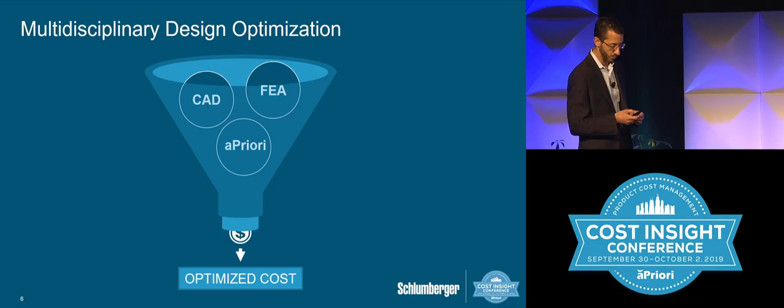So, executive summary. We have two ways of looking at design trade-off. First is one we're going to call static post-design trade-off. What it means is we've done a lot of work, and then we combine it and show it to our stakeholder, or client, or suppliers. Here, I'm going to show you an example of what we've done in the past with that product.

So if you look at this picture, you can see a subsea landing string. It's a safety mechanism used below a platform in the ocean. It's a very big piece of equipment - if you look, there are two technicians there, showing you the scale of the tool. It's about 4 to 5 stories tall. So as a team, we had to develop the next generation of this product.

And as we've seen earlier with a previous presentation, it's good to get as many concepts as possible very early on. So here we developed 7 different concepts, and we did a lot of FEA work, a lot of testing, a lot of hardware testing. But in addition to all that work, we ran about 7,000 quotations with aPriori to get the price point.

So when you do a trade-off, when you share trade-off information with your stakeholder or management team, you look at different charts. A classical one is a spider web chart. Here I put the best price as the top one at 12 o'clock. Then as you go around those 8 axes, you have the tool internal diameter, the tool external diameter, and so on across. What's interesting to do for the design trade-off is to map each of these concepts with their respective criteria.

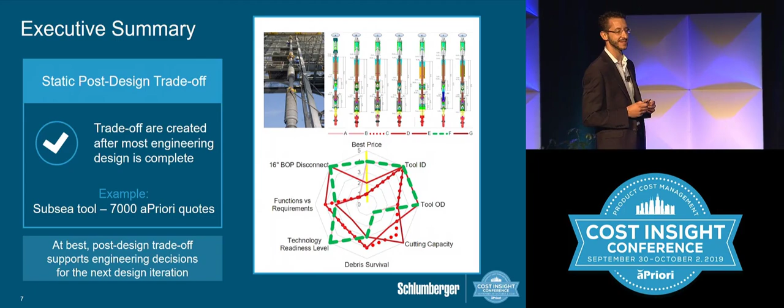Then we go on, D, E - F actually had a better price, but for us it was not the Ferrari. It was maybe another brand, I won't say any. But it had all the functionality we needed, it just wasn't our strong interest. And then we had G. So what was interesting here, from an aPriori point of view, is that very early on we were able to have price points and be able to select which design we went with. And we decided to take F and improve it, of course.

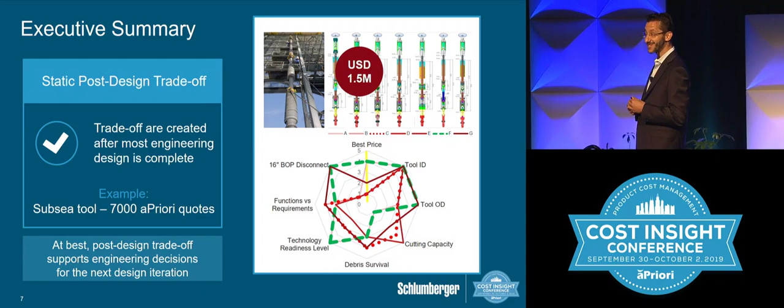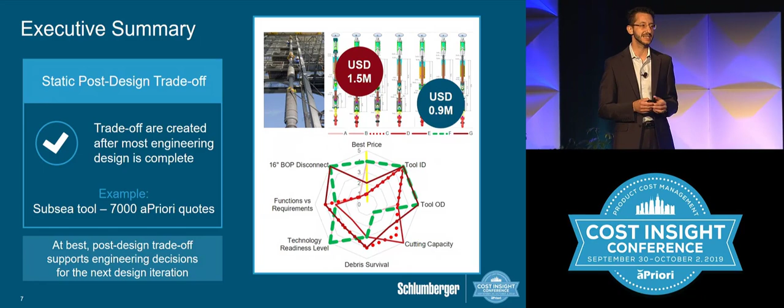The one we really liked as technical people was the Ferrari in red at $1.5 million. And the one that was more aligned with what the market is able to buy was the F1, the sixth one. But that's a static post-design trade-off.

Now let's look at what we're going to present today, and we'll go into more detail. It's really an interactive upfront design trade-off. It's a bit of a complex graph, and we'll see more detail in dynamic fashion after. What you have is parallel information on this graph. On the left-hand side are the inputs, so the first 3 lines are input, and on the right-hand side you have design output. You can change the variability of each of those parameters to get your output.

To put it short, we had a cylinder that was a piston, loaded with a complex load pattern in buckling mode, as well as collapse pressure. The story is we had a 10,000 PSI piston, and one of our clients said, hey, I have an application where it's 12,000 PSI, the envelope that I need. So we went to check if it works. It didn't work. It was too marginal as a design.

So if you have engineers in sustaining, we know the trick. We say, let's take a higher grade material, Inconel 718. And what we see is that our baseline price of 126 with the original design, when we take Inconel 718, turns into a $345 solution. Fantastic, we have a solution.

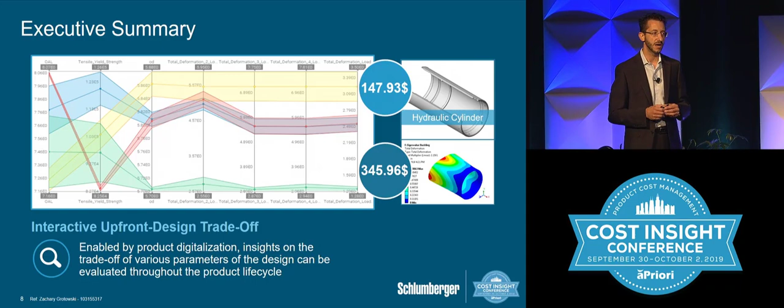But thanks to this interactive upfront design, we were able to find alternate designs with different materials, different geometry, different size, in which we found a price point at $147. So for $20 more, we had a solution instead of 3 times the price.

So why do we need design trade-off? It's very important—we talked a lot about collaboration today. Design trade-offs are used to communicate. It's a communication tool between the different stakeholders in the value chain: your team, your supplier, your management, your technical team, your risk assessment team, your financial team.

It's a visualization tool in order to simplify what's typically complex. Typically you have aggregated data. They're often technical, but you can have financial data as well, other types of data. It's always good, if you can, to have the previous generation of a tool or a point of reference that people can relate to. Here, as an example, it's from an architectural example—I purposely took it far away from our domain.

We see a team of architects that looked at 12 alternate designs, then looked at 4 different criteria. When you have that information, you can do a performance analysis—you combine those criteria together, and then you have a ranking from, let's say, 0% to 100%, and you're able to rank that. So in this example, we see that alternatives 6, 10, and 12 were the best designs that team was supposed to work on.

In order to expedite generation of trade-off, we get some benefits when we're able to do that. When we can expedite trade-off, we can have more innovative ideas because we can do sensitivity analysis around some of the points we look at. We can also accelerate the project because as a team we take the decision a bit earlier to go in that route or that route as early as possible. Then we can select the cost of the tool or the building that's the cheapest, so overall you save in labor and spend on your project. All that maximizes return.

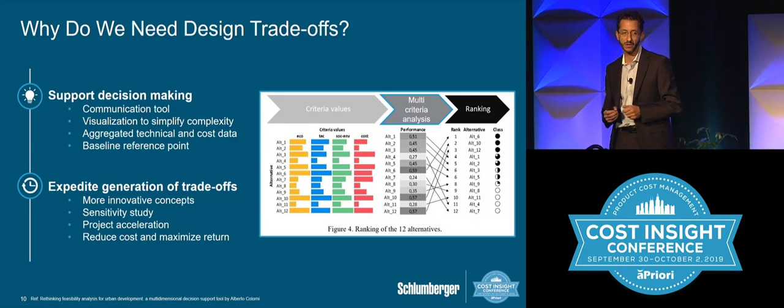So what's the limitation of trade-off curves? Here, for example, we see a very good example of great trade-off curve work, but it has limitations. A team of engineers looked at 6 different concepts of airplanes, and I'm sure each engineer behind each concept loved their airplane and fought for it.

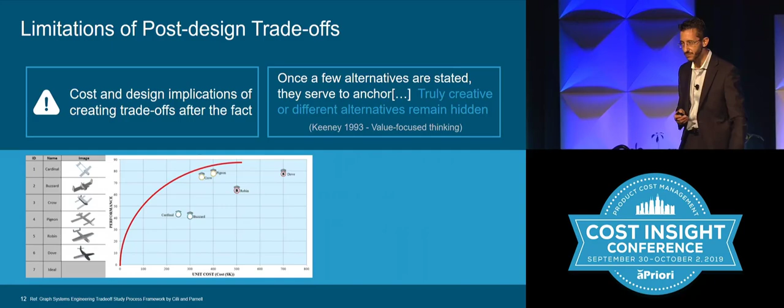So the name of the game and what we're going to show you is to look for this optimum. If we look at literature, you can go to Wikipedia, the source of literature. This is called the Pareto front.

So all the game here is to try to optimize different objectives. Objective 1 on the x-axis, let's say it's the weight of an airplane. We're going to try to minimize the weight. And then objective 2, it's the cost of this airplane. So we're going to try to minimize that.

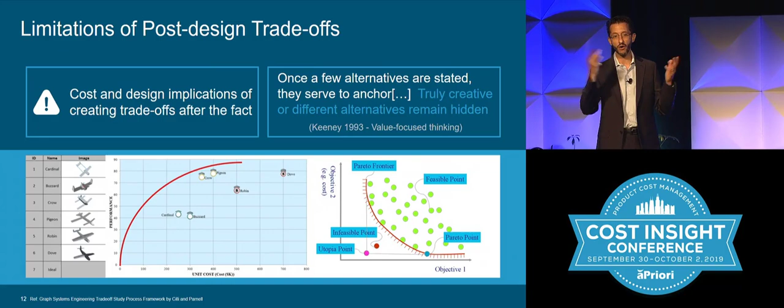What we see on the top right-hand corner in the green bubble are all the potential design space of solutions that exist. And below this red line, the Pareto front, are utopian or non-feasible designs. You cannot have an airplane that weighs nothing and costs nothing. It has no functionality, okay?

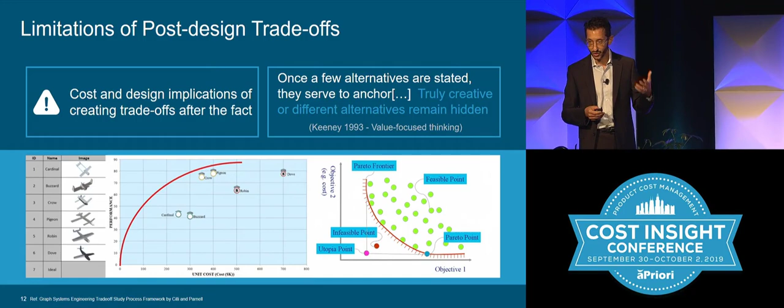So the remaining of the slides are going to be to look for potentially some Pareto points, some of those optimum points that are on this line. And that's where I hand off to Uyosa.

Thank you, Laurent. So like Laurent mentioned, the interactive trade-off that we're now looking into and working with is enabled by what we've termed product digitalization. So before I go in and share the results on this, I would like to first define what product digitalization is. We've defined the term product digitalization as the use of digital technologies to transform our engineering design processes and workflow.

In the wake of digital transformation, as you've heard from the beginning of this session today, digital transformation significantly reduces the cost of product engineering. So for us as engineers, within the product development aspect, we're looking at how can we transform our product design workflow. And the type of transformation I'm focusing on in this talk is automation. How can we automate our product design workflow?

This automation, we've identified 4 key drivers that enable us to implement it. The first one is model-driven engineering, which is rapidly growing and I think is very near to maturity today. Most of us here would agree, 10 years ago you were not doing as much modeling during your product design as you are today. So that growth and change in adoption of modeling and simulation as an engineering tool is one of the enablers for what we've termed product digitalization.

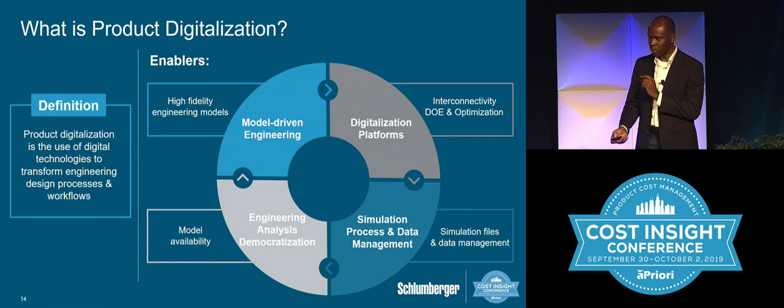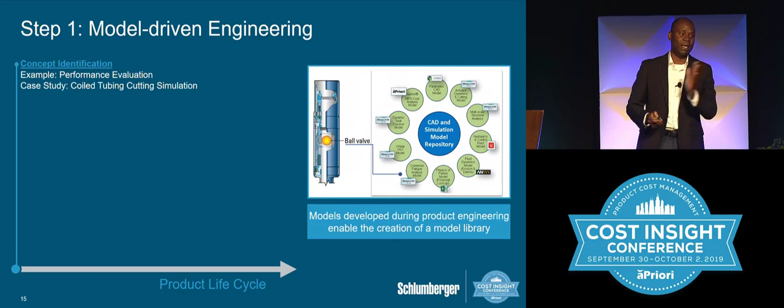Some of these models were developed during the concept identification stage, where we're evaluating different concepts and identifying which one is best. During the product design phase, we're looking at design requirements and ensuring that our design actually meets the requirement. The example here is a ball seal, where we're ensuring that yes, the ball can seal the pressure we're designing for and the temperature we're designing for. The third, still within our product design lifecycle, is design optimization.

You've identified your design, now you need to optimize it. The example here is using aPriori for design for cost, where we've already identified the best solution we want to move on with, and then we feed this through aPriori and do iterations to optimize for cost.

The next source of engineering models that we're going to use to enable product digitalization comes from the product validation step, where we're actually taking our design and running all the environmental variables through it to make sure our design is robust enough to go to the field.

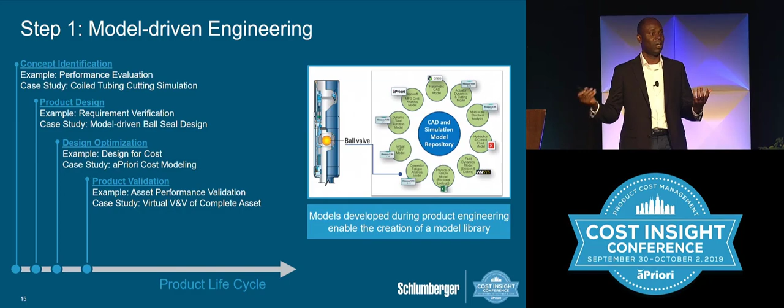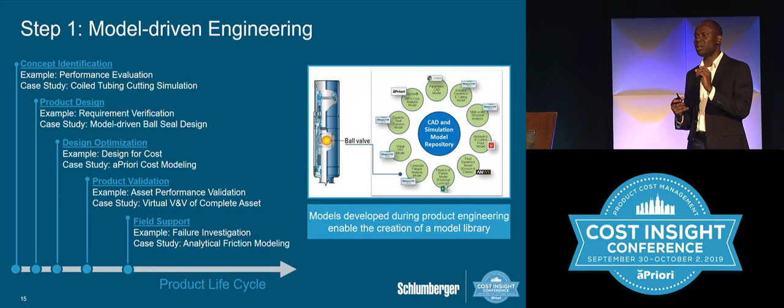And finally, when it goes to the field and we have failures, we use modeling and simulation to evaluate our failures. Effectively, this is how we develop all the models we use to address the functional requirements of a product. You put all these models together, and it gives you a library of product.

That's the first step. The second step is to then take all these models and create an automated engineering design workflow. I'm going to walk you through a simple one, without going into elaborate detail for the sake of time. Take, for example, a part I have to design - this is a true case that we looked at and created a workflow for.

I have an existing part, and the client comes to me and says, can you update this design? Can you increase the performance to meet our requirement? They give me their requirement - some dimensional requirement or some load requirement.

I feed that through Mathcad, because I already have a Mathcad calculation for this product. I get my safety factors.

If my safety factors are not met, what you don't see here is that there's an automated loop that goes through and modifies those dimensions until my safety factors are met. If they cannot be met within the range of variations, it checks out - that's why you see false there, it's not feasible. But if I find a feasible design, then I go on and create the CAD model.

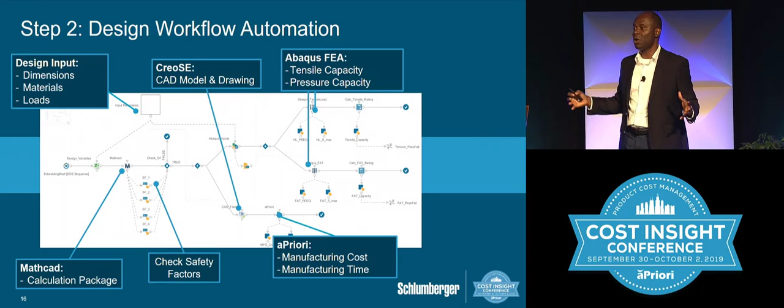I take the CAD model into aPriori, get my cost implication, and then I finally took all those models and run FEA on it just to validate my design, looking at my environmental variables.

So effectively, when I run this, what do I get? I get all my engineering files. My calculation package is automatically generated. My CAD drawings, my CAD model, my analysis report is generated.

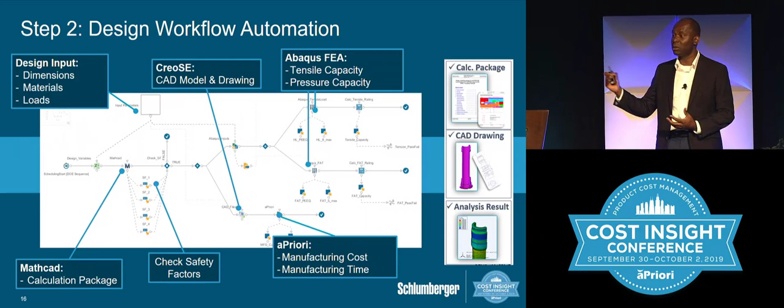That's the second step. The third step now, using this workflow, still within the same MDO platform, we go ahead and look at all the variation. For this specific instance, we looked at the variation of designs we've had over the last 2 years from our customers, and the variation of environmental conditions and load conditions we've received over the last 2 years from our customers. We use this to create a robust DOE space.

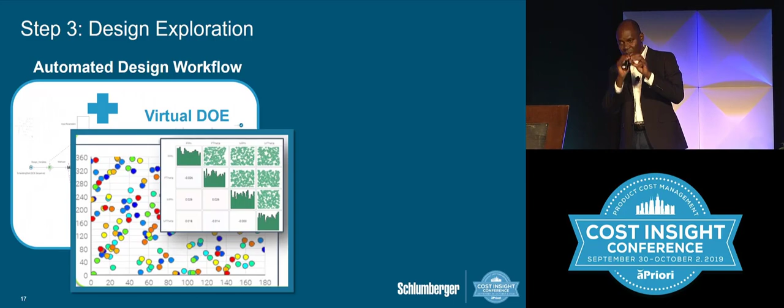So each data point there is a potential design, a design on its own with the dimensions and the client information. Using the automated engineering workflow, we execute each of these designs automatically. Guess what I didn't mention earlier - the workflow we generated typically takes us 2 weeks of engineering time. It went from 2 weeks to 6 minutes.

6 minutes. So now, looking at hundreds of designs, I can execute this overnight, come back - and this is a real case - and then be able to do the exciting dynamic trade-off that Laurent talked about.

It's very important for me to mention here that the software we're using to do this is modeFRONTIER, provided by ESTECO.

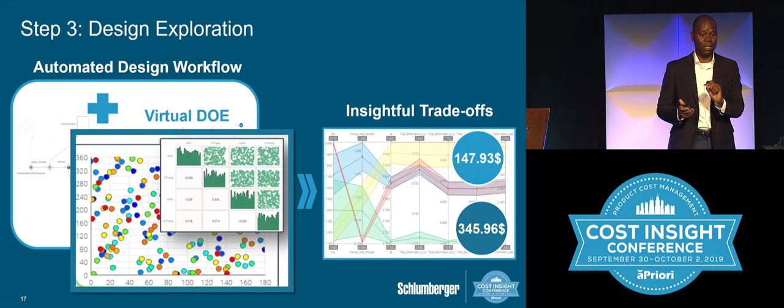So if I go in, I've generated a lot of engineering that addresses each of these individual designs. Now I get my result. It's a dynamic chart, as you're going to see in a minute.

I'm going to have an interactive session with Laurent and say, well, this is my chart of my design. I don't have a single design anymore - I have tons of designs. Each line you see there is a unique design, where the first 4 columns are mandrel ID, OD, length, and the material index. And the last 3 are the capacity of the design - the FAT capacity, the tensile capacity, and the cost.

Those are outputs. So I've pretty much explored the use case of this product, and I'm going to ask Laurent, what would you like to have for your client use?

Assuming he's my client - we just got a call from Malaysia, okay, and we have a rapid response to respond to fairly quickly. They're interested in having a latch mandrel with an ID of 6.4 for drift. The tensile load is 500,000 pounds, and they're looking for about 19,000 psi of pressure.

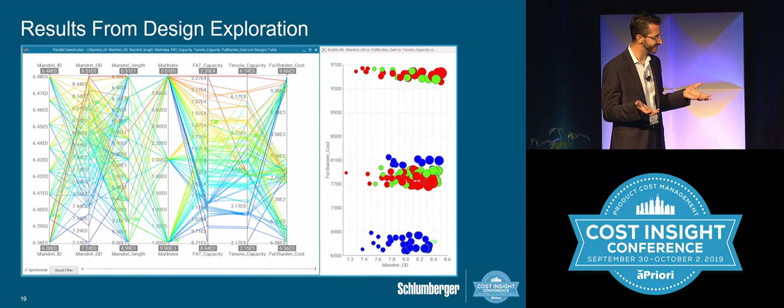Okay, I cannot read your graph. Do we have any solution? Okay, let's assume you don't even see my graph, okay?

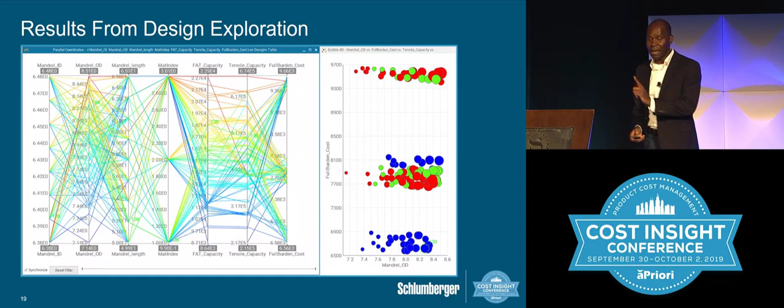Typically, I get something like that, and I spend 2 weeks of engineering time to give feedback and say, this is the potential cost, this is what it looks like, or maybe it's not even feasible. And then the conversation goes on. But right now, I can actually go on this chart, and I can move my ID to what he has asked for, 6.4, and the designs that don't meet that requirement are grayed out.

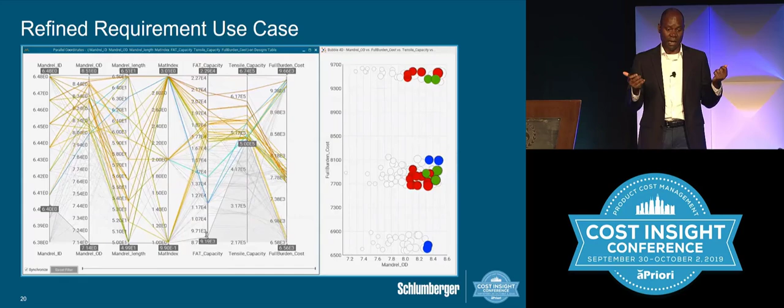I can go into my tensile capacity. He wanted a capacity of 500,000 pounds. I simply drag that up as well, right? Set the limit to 500,000 pounds. Designs that don't meet that requirement are phased out. And then he wanted a pressure of 19,000 psi. I drag that up as well. Designs that don't meet that requirement are phased out.

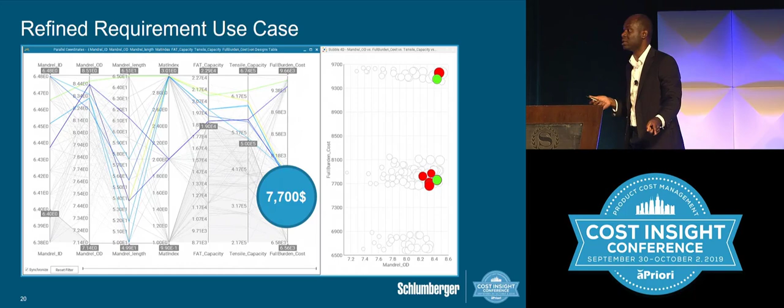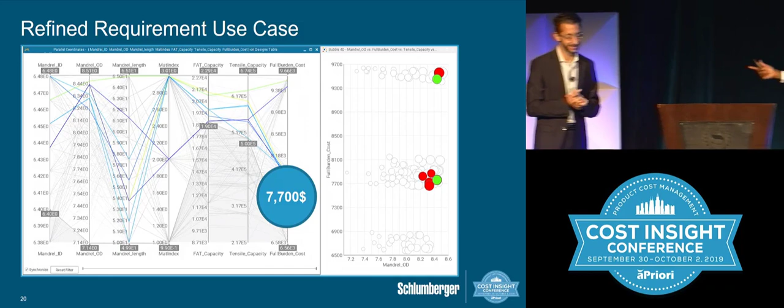Finally, I have all the designs that meet his requirement. Within this, I can do trade-off and identify the cheapest design that meets his requirements. Not cheap enough. There's competition in Malaysia. It needs to be less than $7,000, if not we're out of the market. Okay, so that's the conversation we should have had in 2 weeks. But I can do that on the fly as well. I reset. Now you want $7,000. Let me see what I can get you for $7,000.

Great. I can give you 500,000 pounds. I can see there on my tensile capacity. Good. For my pressure capacity, that's the second to the last one. I'm just shy of what you asked for, 19,000. I'm 18,700. I can talk the client into it. So that's good. So we're fine. Is this good for you?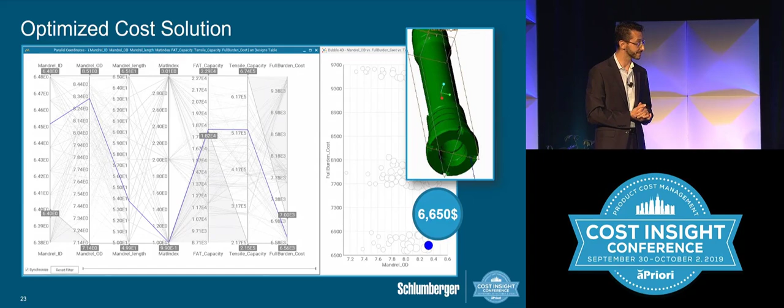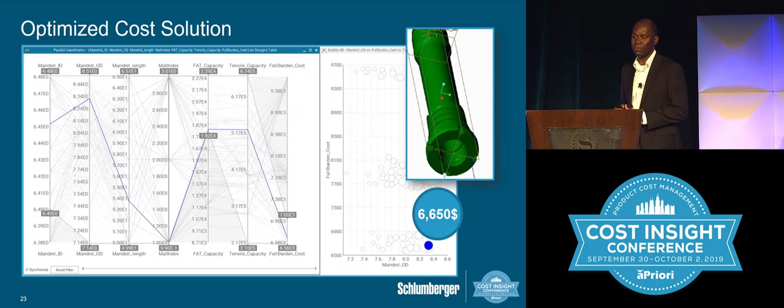$6,650. Yes. We've seen innovation, collaboration, and acceleration. Absolutely. So this is what we're doing today. It's transformative, it's reducing cost, it's reducing time, and the impact on engineering and the future of Industry 4.0 is huge. I'll let Laurent give us a summary of the talk.

So quickly, we've seen that static post-design trade-offs are good to capture knowledge, but they tend to be a bit late. Whereas interactive design, upfront design, really helps to find and poke and look for an infinite space of alternatives. As well, we've seen that we could find optimum concepts on the Pareto front and select one Pareto point.

And then most of it, the biggest value, that's what we've heard many times today, it's to energize the communication, energize the discussion of what-if scenarios among the different persons along the value chain. For product digitalization, which includes cost modeling like aPriori, we can really start talking with business comparisons among the different concepts with a price point. From your stakeholder to have trusted information, it's better to have a known reference. It always helps in the discussion.

And we've seen as well that we can accelerate all the different points along the life cycle, whether it's for customization of design or increasing of the family sizes, or sustaining, or even knowledge capture, knowledge sharing. If you have this algorithm, this DNA of your family of tools, and you have a new employee come in, they can very quickly work with what the previous team has left.

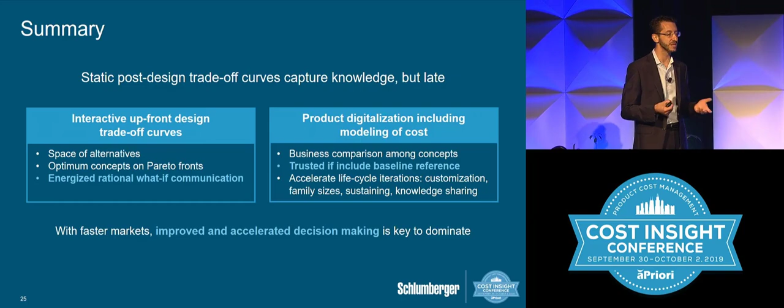So overall, what we've seen already many times today is within the faster market that we live in, improved and accelerated decision-making is really the key to be dominant and even sometimes maybe survive. So I will leave you with a few conclusion points. So we've seen how we can combine CAD, FEA, aPriori, or many other softwares in order to optimize different aspects, but the cost being one of the primary drivers of business.

Always question and challenge the assumptions. I'm sure all of us believe we have the best product, but I'm not sure we all have the most optimized product. I'm not sure all products are Pareto point products. It's very important to democratize digitalization within your teams, within your work, to make sure that we can find those Pareto points. As I mentioned before, calibrate your scenarios. That's how you'll get trust from people. Then only negotiate the what-ifs with the different people across your value chain.

Tools like this allow you to measure what's important and not what's easy to measure. For example, fatigue in some applications is critical to know. Fatigue is very hard to measure. When you have a digital twin of your tools, you can measure fatigue. And finally, as the last point, I will say that communication is key to use this trade-off to make things more understandable and not more complex.